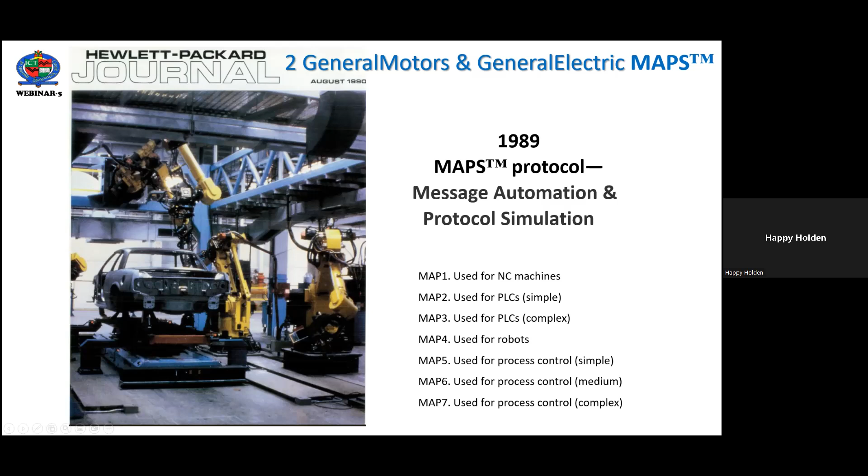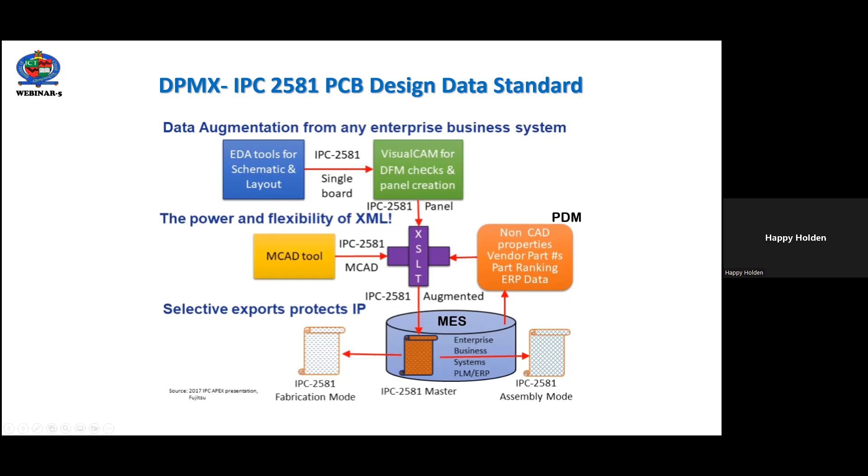So 2581 is a language and visible use of the single board, and then how it's going to be panelized and put into either bare board fabrication and test or assembly level and test in routes. And that's very important because the 2581 is specifically integrated with the IPC CFX assembly method. And so, preparing areas of data preparation for manufacturing execution, the digital engineering of selecting materials and analyzing it, and then the execution of the manufacturing of that in terms of different digital threads from the IPC, hopefully all seamless and automated.

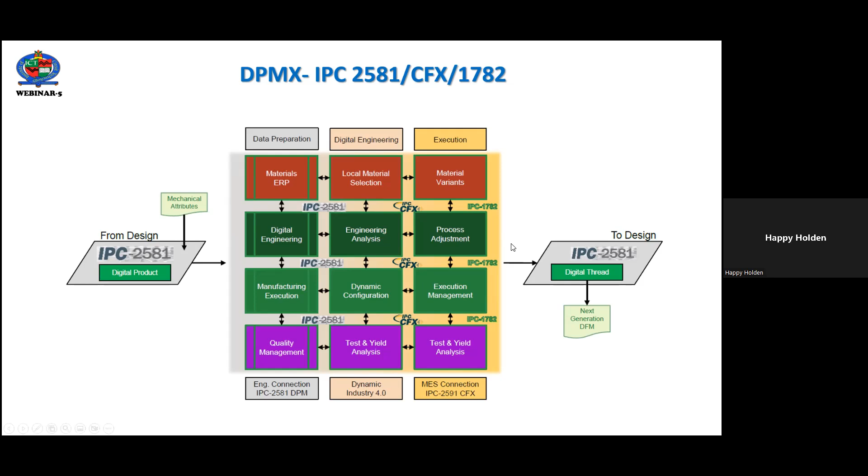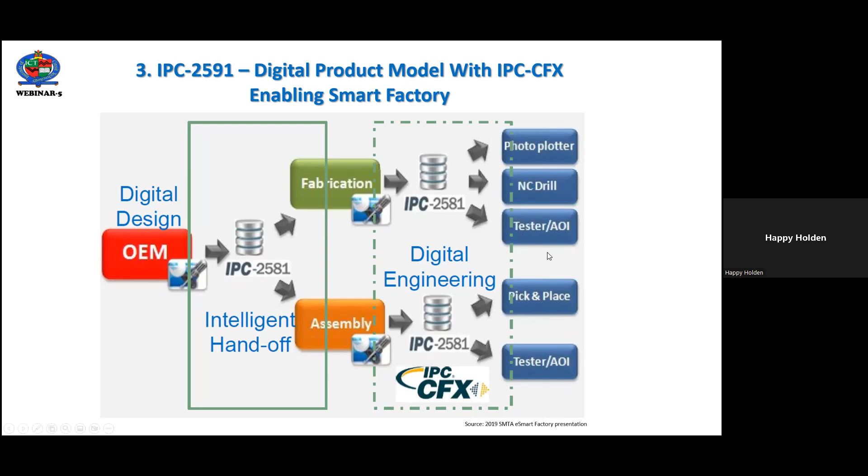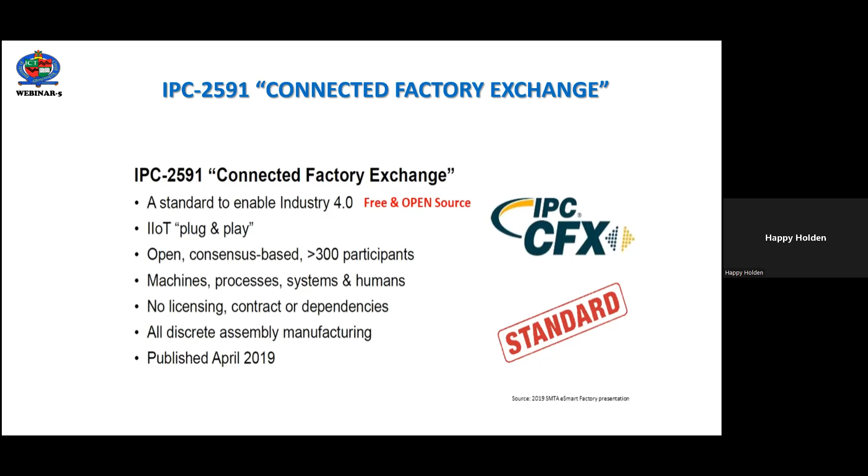So the 2591, which is the IPC Connected Factory Exchange, is CFX. It's a free and open source industry standard focused on Internet of Things plug and play capability. It's consensus based, working with 300 different participating companies in developing the IPC standard and software for machines, processes, systems, and even humans. There's no licensing, contract or dependencies, and it's for all discrete assembly manufacturing, first published in April 2019, and constantly updated by the IPC for everyone's use.

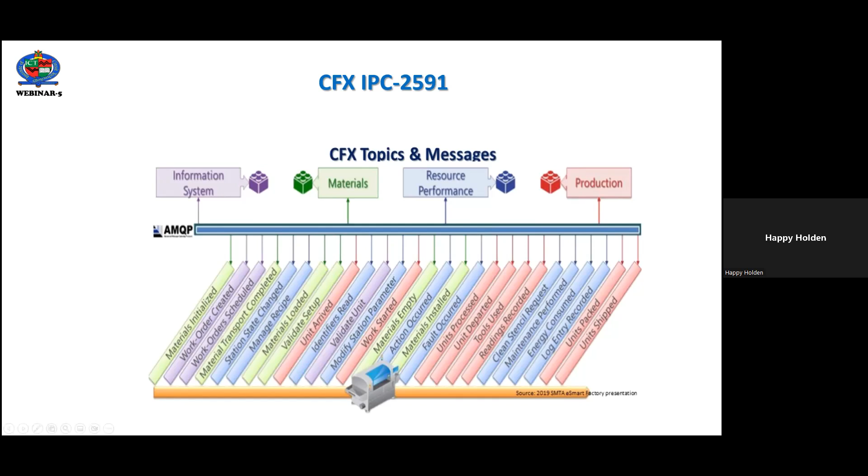It uses a communication protocol that's very secure, like ATMs for banking, the AMQP, and it has a defined language content with structured topics and messages about printed circuit fabrication and assembly, and the data encoding using a JSON methodology for the components of the CFX. It's basically based on messages and communications bidirectionally, in terms of downloading recipes, work orders, various other information that is useful in electronic assembly, and uploading that information and then providing communication machine to machine as the particular printed circuit board goes through the assembly process.

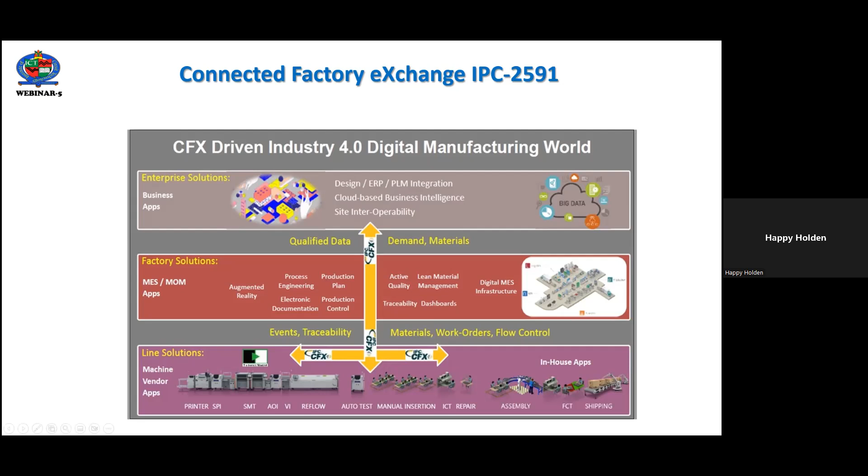And it's kind of a driver for Industry 4.0 in that it's by far the newest connected factory communication exchange, but also today one of the most robust and fastest developed because of the enormous contributions companies all over the world have made to help develop this, so that the entire line solution in terms of solder paste printing, AOI, reflow, testing, even manual insertion, repair and assembly, all the way out to shipping, is made available, hopefully, to a plug and play connectivity that in many ways eliminates a lot of the work that you would find very difficult and exhausting to do.

But it also provides the opportunity for companies to develop smart software that they can sell, to provide other even more significant results in terms of closed feedback loops that were not closed in the past, from paste inspection now being able to do corrections back in real time to the screen printer, or paste inspection changing some of the SMT placement and areas like that.

For some of the recorded results: decreasing first pass failures by a factor of 10, decreasing the average cycle time, and increasing product reliability. And this can be provided anywhere with that.

CFX also provides assistance in that CFX has SDK development information available to users for the first time and to machine developers, so that it is implemented in their machine in the consistent and focused methodology that is needed for this to be plug and play, where you don't have to worry about it as long as it's CFX compliant. Just plug it in, and these messages will be passed back and forth, in and out to the humans, everything like that. So it's a very, very involved program that has a lot of users.

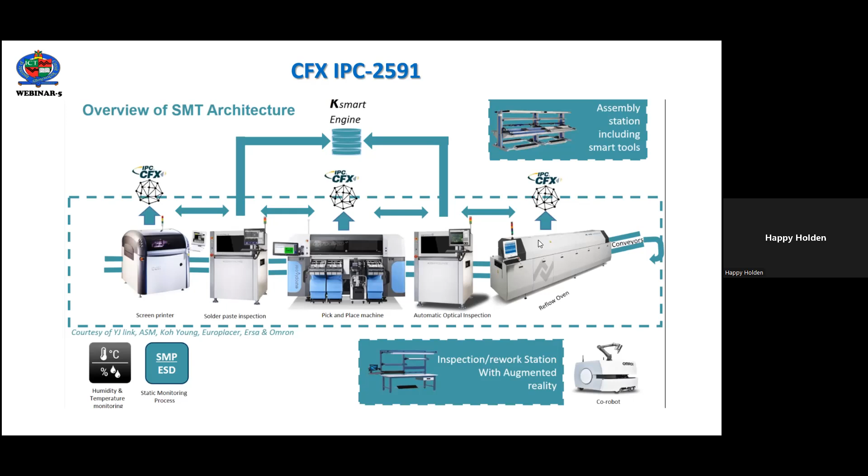The overall SMT architecture includes also smart tools, human inspection and rework, and the beginning of the addition of co-robot material handling, as well as static monitoring and environmental humidity and temperature monitoring, as well as the standard pieces of equipment illustrated here: screen printer, solder paste inspection, pick and place, automatic optical inspection, reflow oven and conveyors. And in past APEX meetings, they've actually assembled this equipment and demonstrated CFX in real time for people.

So CFX is a digitization for the smart factory, one which, hopefully, because of 2581, includes design engineering in the program, as well as the component engineer and the selection of materials, then procurement, as well as suppliers of material, components and equipment, and then manufacturing in terms of assembly and test plans, build schedules, tooling fixtures, et cetera, in order to make this a smart factory implementation.

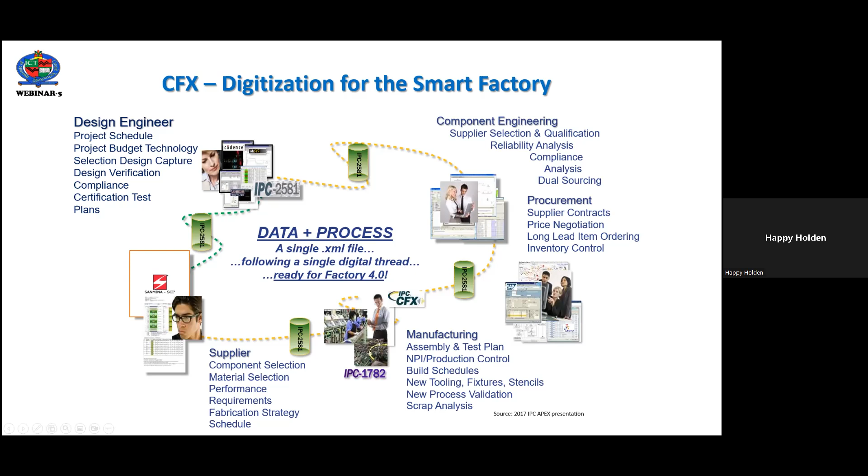And as people join and add new capabilities or new technology, they also submit the requirements for new messages, maybe for their technology that currently doesn't exist. And that goes through this corporate and committee organization quickly to be approved and then set up as the standard revision of the software to provide for technologies and enhancements.

Now, it doesn't leave most of us out, because a number of people have equipment that is not CFX compliant and is perfectly modern equipment. It just doesn't have that communication standard. Well, fortunately, Seica in Italy has used the popular Raspberry Pi computer that you see up there on the right with their own data acquisition system that plugs into the 40-pin GPIO of the Raspberry Pi

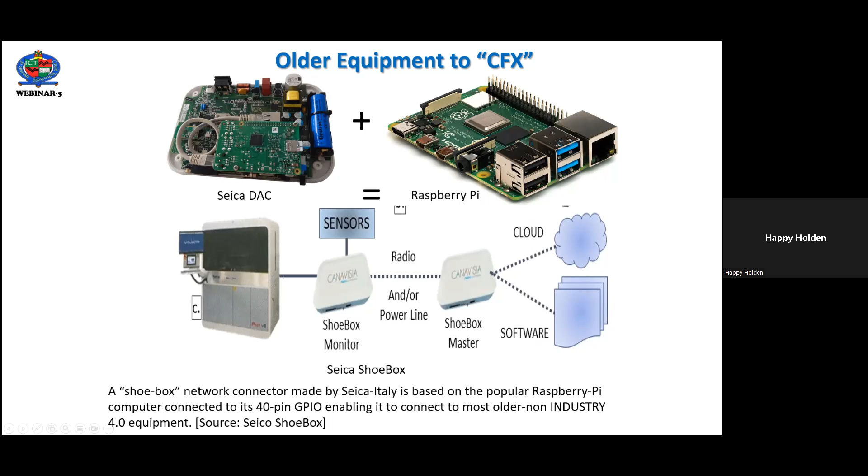And the interesting thing about this one is that it uses and makes available radio as well as power line communication within the factory. And then their master provides the connectivity up to the cloud or manufacturing management software, things like that. So this provides a way that you can tie in the entire production line, even if the equipment is not CFX compliant currently.

A fourth one was developed by Mentor, and now Siemens, based on ODB++. And it starts with OML. OML is an adaptation of the semiconductor integration initiative developed by TSMC in Taiwan, called the TSMC Model Interface, TMI. And this was voted by the semiconductor consortium. The new model is an open model interface, still pending as a SEMI standard.

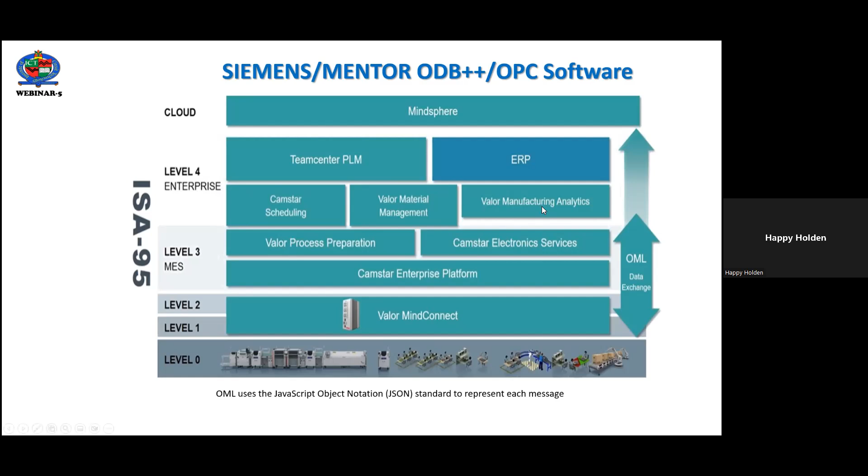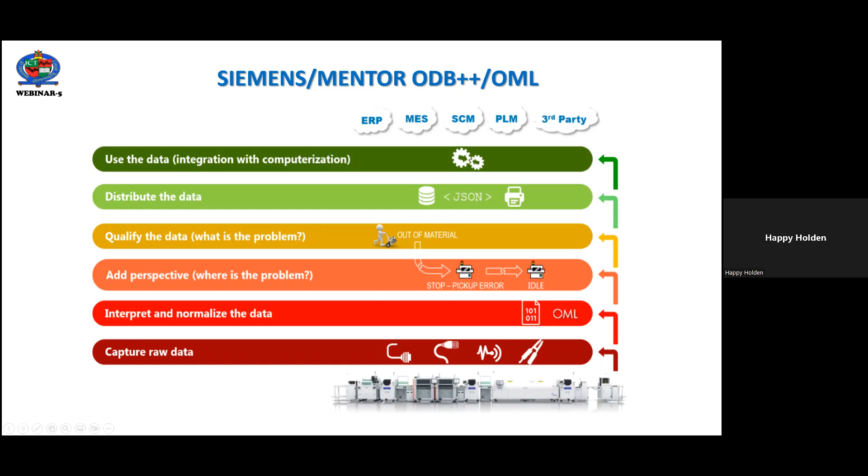So the Siemens one, based on their acquisition of Mentor, is focused on capturing raw data, then moving that up and interpreting it, normalizing the data, then adding perspective mixed with other data to qualify whether it is in control or not, and then distributing the data and using it to integrate with MES and ERP software to provide smart factory connectivity, utilizing their line controllers, gateways and hardware boxes. A little bit different than CFX, which puts this within the controllers of the equipment themselves through the CFX software.

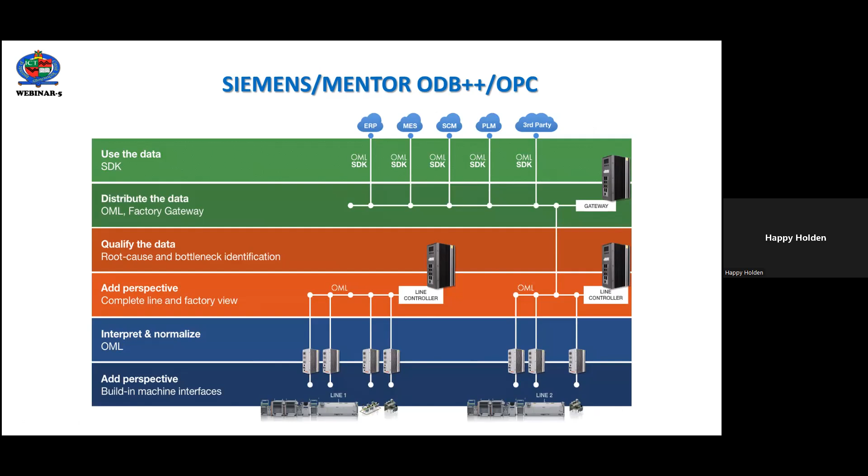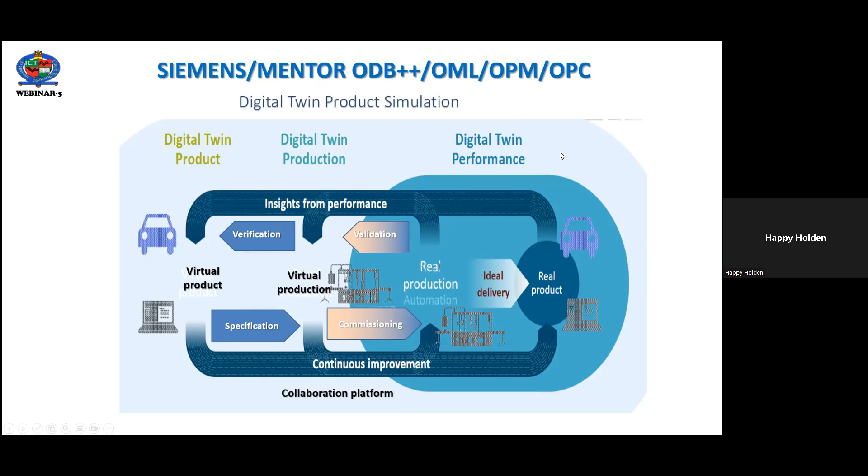So the Siemens one, if you look at their advertising, it focuses a lot on digital twin product simulation. They talk about digital twin of the product, the virtual product, digital twin of virtual production, and focusing on real production automation and real products as a collaborative platform. The last one is the most complete and the largest one.

The fifth one is from SEMI. And SEMI, the Semiconductor Consortium, developed in the early 80s the hardware and software to connect wafer fabrication up and down the computerization line for remote control of equipment and online monitoring and remote diagnostics, as well as equipment simulation.

And so the SEMI SECS/GEM standard is again based on standardized methods and standardized drivers and interfaces to specific pieces of equipment, then provide both recipe and input of data, control of processes, and then upload and download of recipes to other factory level systems. But it has an enormous installed base because it was first adopted by the semiconductor people around the world, as well as by Hewlett-Packard and others.

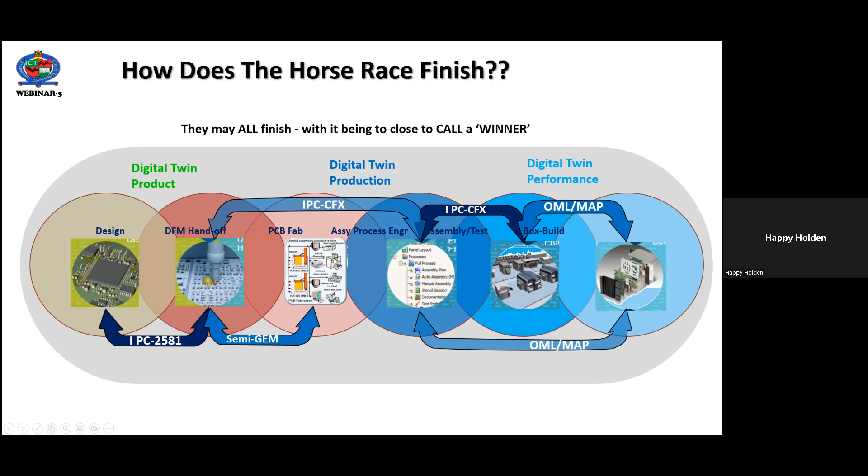For PC fabrication, it's likely to be this SEMI GEM, SECS/GEM standard. And then for box build and robotic assembly, either the OML or the General Motors MAP standard may be there. So the entire sequence is likely not to be one particular industry standard, but a group of open source standards that we've talked about here, which unfortunately makes it a little more complex, but nonetheless, everybody's coming from a different direction with that.

So the Industry 4.0, the smart factory we're talking about today, is focused particularly on sensing in terms of real-time processes and data, connecting these different unique data sources, and then predicting the outcome with a digital twin. Prediction is a unique focus of Industry 4.0, but to date, I've not seen any examples of software available that offer such predictions other than semiconductor digital twins that came about 30 years ago as simulation.

As part of my work with Hewlett-Packard since the 1980s, what I call Industry 3.75, not Industry 4.0, I and my team developed 3 different digital twin standards 30 years ago. A very accurate yield prediction model for PC fabrication based on design parameters that had a first pass yield error of only plus or minus 3%. The second thing, we developed a performance simulation of a virtual PC board, in other words, a software digital twin, that allowed us to test materials and design rules and placement and routing before we physically got into a CAD system and designed the PC board in order to optimize that design.

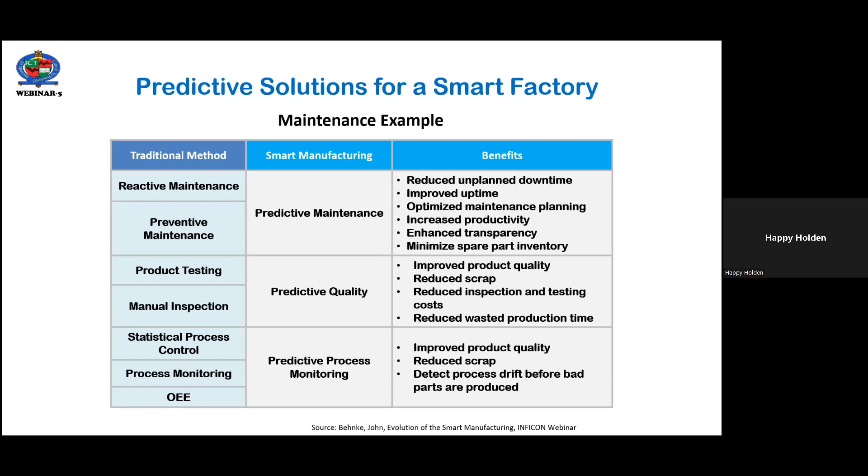This whole area of predictive maintenance is based on predictive analytics, which is transformational as part of 4.0, again, in maintenance, moving from reactive maintenance, where you fix things that fail in firefighting, to preventive maintenance, to condition-based maintenance, and finally to prognostic and health management, PHM. PHM is a system discipline focused on detection, prediction, and management of the health and status of complex engineering systems. And if we're dealing with a more and more automated networked manufacturing operation, then constant predictive maintenance is an essential part, because you fundamentally can't afford anything to fail under this kind of methodology.

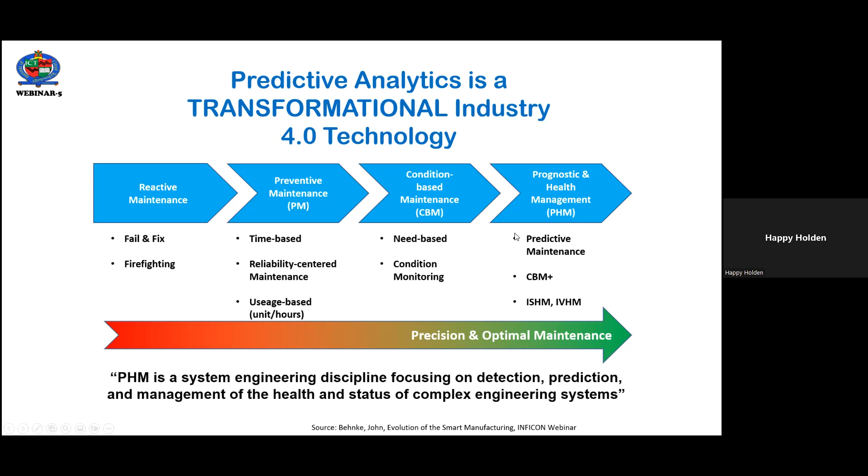And this is available in more detail in the third I-Connect007 free ebook that you can download, which goes into manufacturing execution systems and the advantage of that type of software in your smart factory, as well as 5G enabled smart factory scenarios in which more and more will be wireless. And because of that, you don't necessarily have to run cable over the factory. That's one reason why the Raspberry Pi is used, because the Raspberry Pi comes integrated with wireless Wi-Fi networks as part of that $42 computer system.

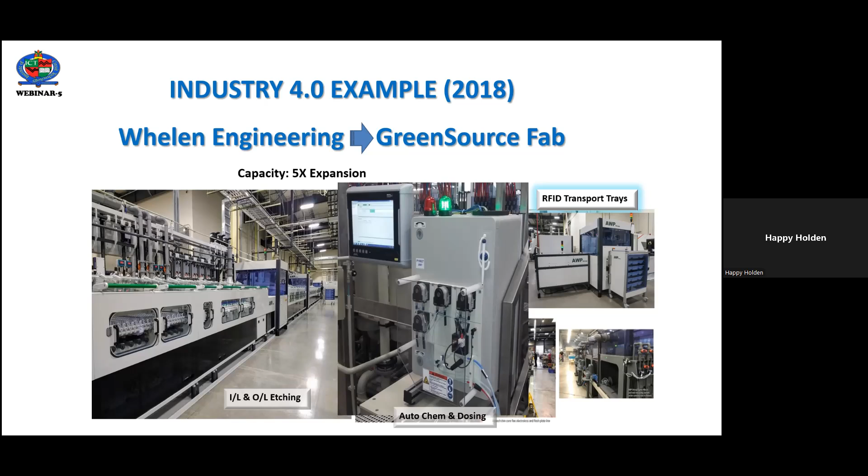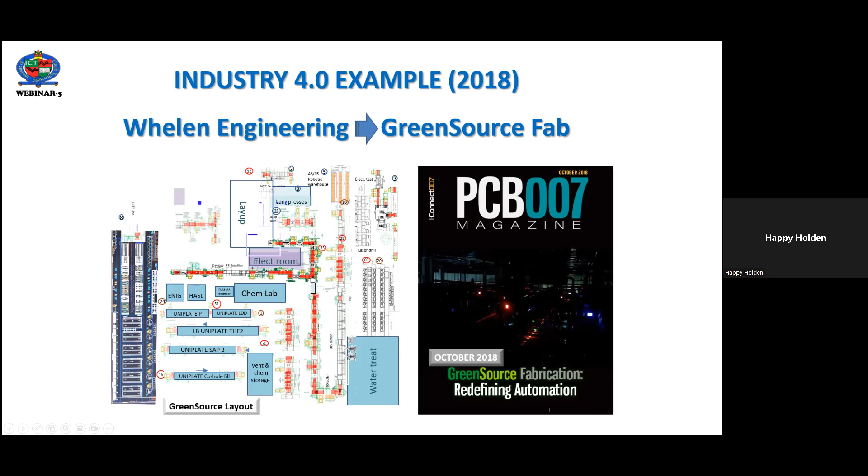Some of the equipment pictures here. Here's the layout of it. You can see this in many of the I-Connect007 magazines. One of the reasons why is that it's a lights-out factory. So, here's an actual photograph of the GreenSource multilayer fabrication facility before they turned the lights on, so that we could run our drone down and photograph it for you. And so

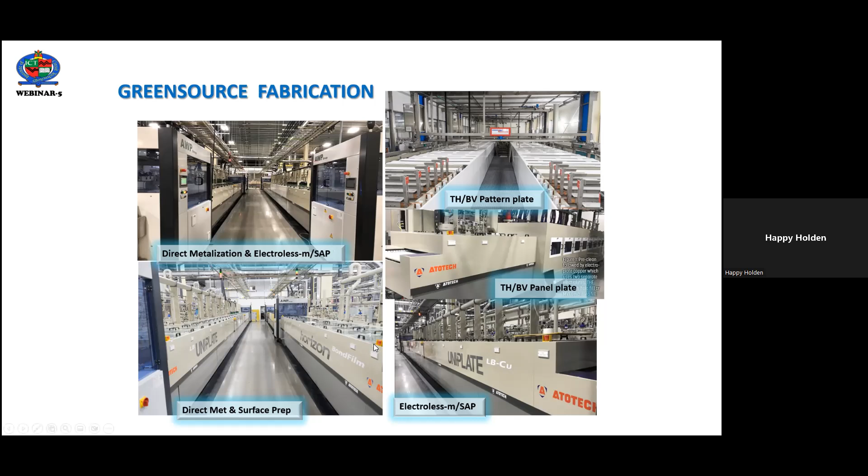different direct metallization and mSAP electroless processes, a new generation of through-hole and blind via plating that provides up to 5-to-1 blind via ratios and up to 30 to 40-to-1 through-hole aspect ratio. And then the through-hole and blind via panel plating, as well as, again, part of their direct metallization, SAP, and surface preparation systems.

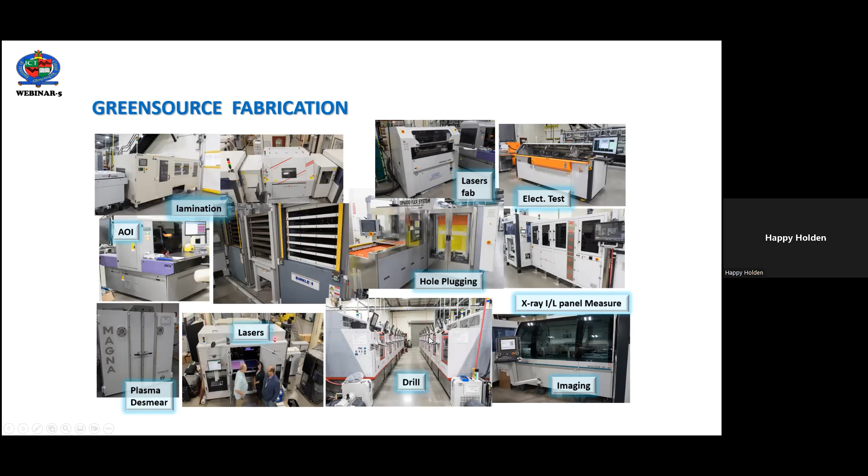The lamination utilizing the new induction, two-sided automatic laser drilling, inline electrical test, inline hole plugging, X-ray, plasma desmear, and drilling and imaging. Their imaging, this is a semiconductor one, is down to 4-micron traces and spaces.

But part of their Industry 4.0 example is an excellent illustration of Industry 4.0, in which you measure the data in real time, learn from it, and then use that to predict. So, leading to predictive data and prescribed actions, for hindsight, insight, and foresight in terms of the data analysis. So, this is an excellent example of utilizing sensor data and equipment data to actually improve the quality and productivity of plating and electrical test and exposure

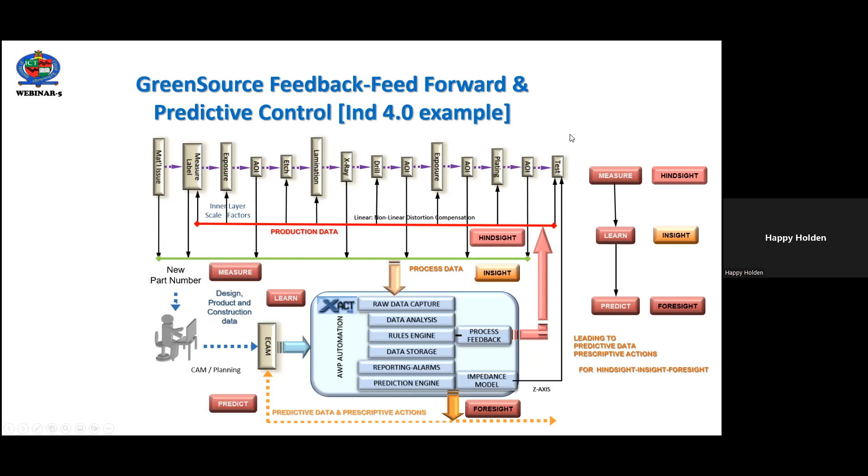in real time. And so, again, this new GreenSource facility really has only 19 technicians for 24/7, but they're still recruiting engineering. Zero effluent. Again, even though it did a 5-fold expansion, they actually use less water. The water being used is less than the actual toilets and community water usage, as well as the chemical recycling. And the copper recovery now is an even greater profit center, paying for a lot of that because they're etching up to 6-ounce copper, and all that copper being etched is recovered as copper itself to be added back.

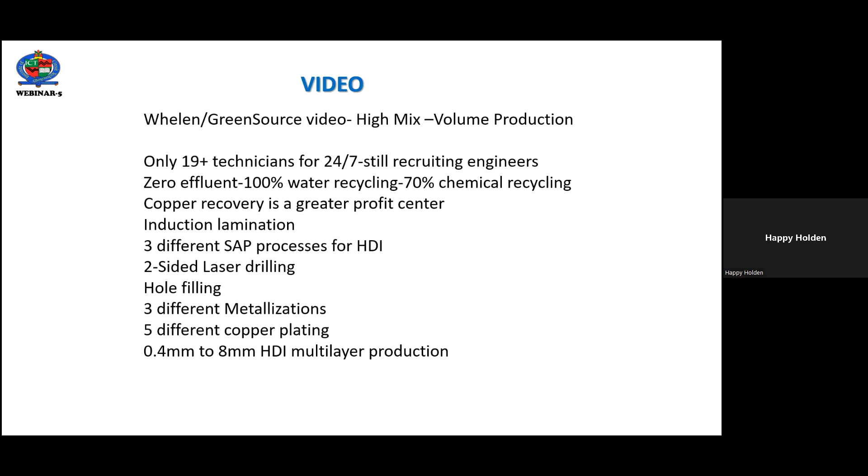Moving on to induction lamination that saves them an enormous amount of energy and costs, as well as providing the temperature to handle flex-rigid and other types of materials. 3 different SAP processes for HDI. Again, 2-sided laser drilling, significant hole filling. 3 different metallizations, 5 different copper platings for blind hole copper plating of either high throw and/or copper filling of blind vias, and the ability to intersperse multilayers from 0.4 millimeters up to 8 millimeters thick simultaneously in production. So with that, I'll run this quick overview for this.